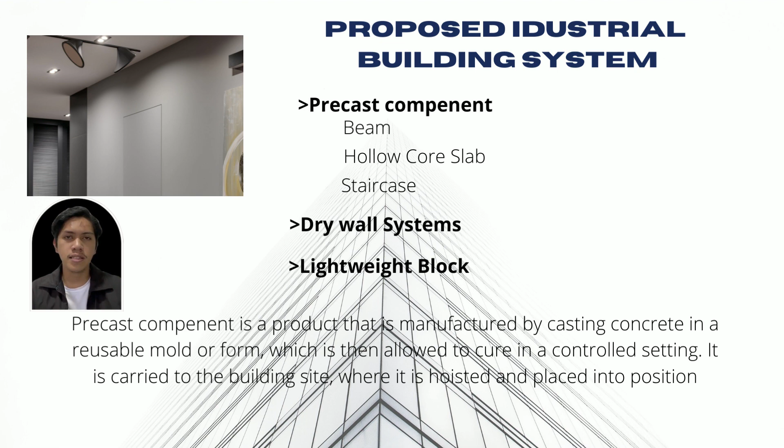Precast component is a product that is manufactured by casting concrete in a reusable mold or form, which is then allowed to cure in a controlled setting. It is carried to the building site where it is hoisted and placed into position.

Precast beam is used for suspended flooring, used as a ledge for other forms of precast flooring to sit on. There are 5 types: T-beam, L-beam, rectangular beam, U-beam, and beam shell. It can be reinforced with either pre-stressed strand or conventional reinforcing bar, depending on the spans, loading, and the precast production method.

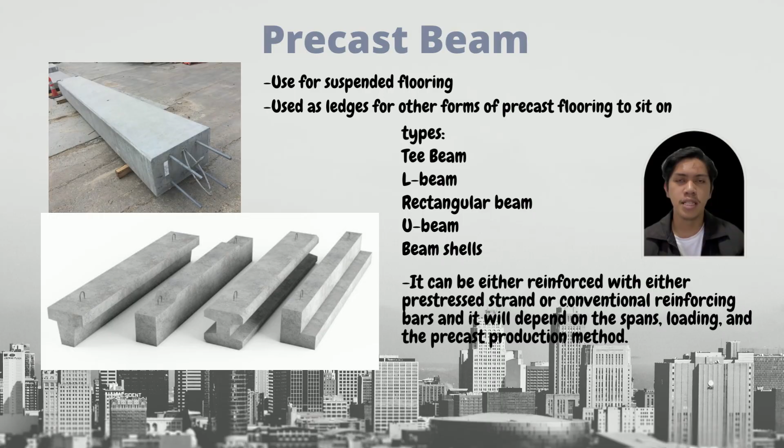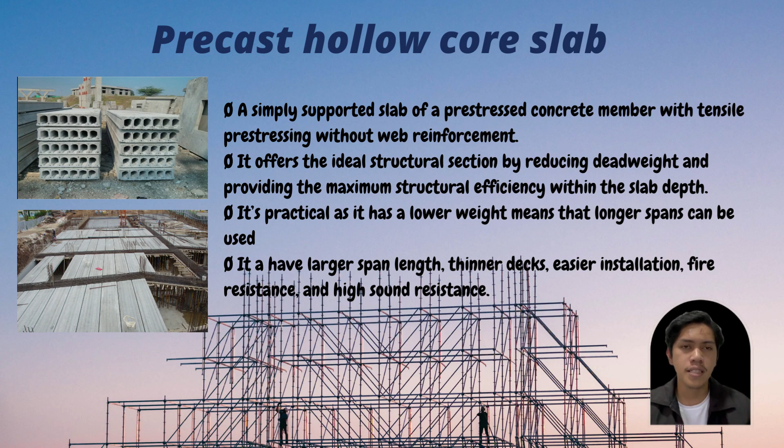Precast Hollowcore Slab is a simply supported slab, a pre-stressed concrete member with tensile pre-stressing without web reinforcement. It offers the ideal structural section by reducing weight and providing maximum structural efficiency within the slab depth. It is practical as it has lower weight, good span length, thinner decks, easier installation, fire resistance, and high sound resistance.

Precast staircase is a structural member that provides access from one floor to another. The precast staircase is made up of reinforced concrete to eliminate the trouble of adjusting the number of steps, riser, and width of the stair flight. It is more precise in measurement, fitting the structural system, with more strength and low maintenance cost. It also saves more cost, saves time and space on site, and reduces wastage of formwork during the construction period.

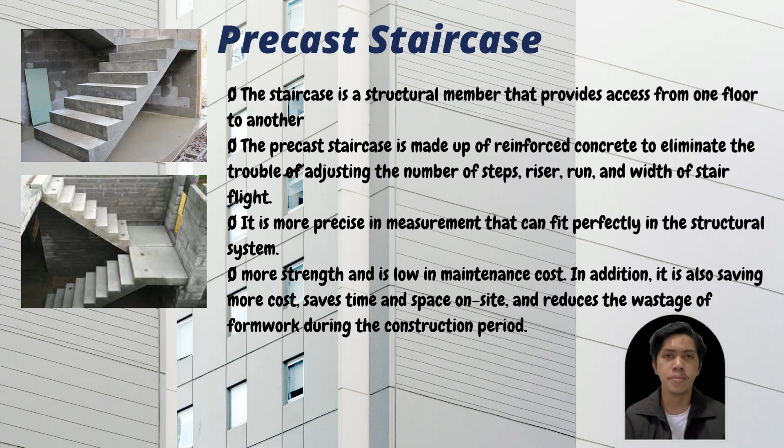Drywall system: it is a series of lightweight walls that are assembled with aluminum zinc alloy coated steel components together with one or more layers of gypsum board fixed to one or both sides of the wall, as well as insulation material.

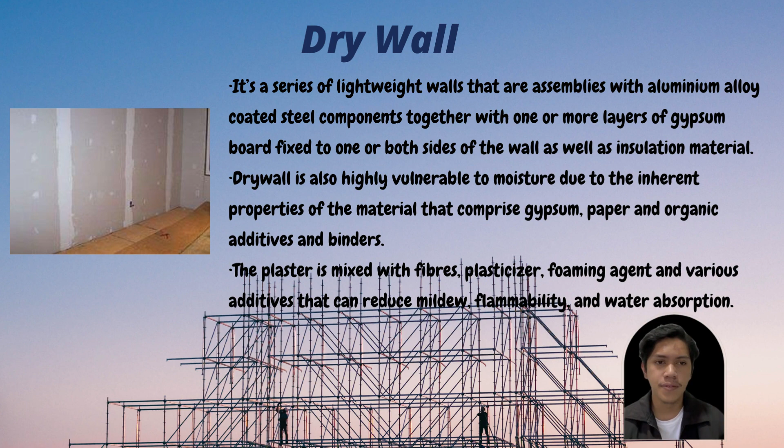Drywall is also highly vulnerable to moisture due to the inherent properties of the material, which comprises gypsum, paper, and organic additives and binders. The plaster is mixed with fiber, plasticizer, foaming agent, and various additives that can reduce mildew, flammability, and water absorption.

Lightweight block is made of expanded aggregates such as shale, clay or slate to reduce the density and weight compared to standard concrete block. It is flexible and easily transportable building material, requiring little support from materials such as steel or additional concrete. It is cost effective, has low thermal conductivity, and is fire resistant.

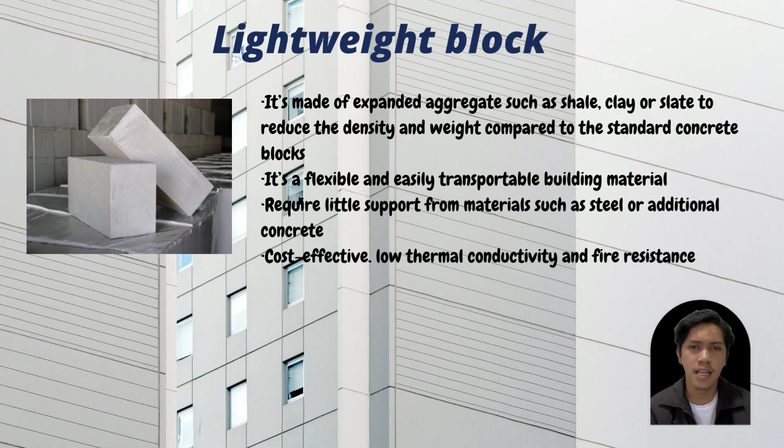The first IBS component used in the case study is precast beam. For suitability, the use of this precast beam is highly demanded by buildings that provide public service such as hospitals, in order to maintain the integrity of the building and prevent adverse events such as earthquakes.

For fabrication, first, the mold used for such application must be extremely durable, which is why steel molds are so popular today. A clean and debris-free mold is required.

Fourth, ensure there is enough curing time and the ideal environment. Then loosen and remove the bolts and pins from the mold case and take out the component from the mold before lifting.

Next is connection detail. The bearing pads on the column corbels are used to secure the precast beam. The pad accepts expansion, contraction and rotation at the bearing region, protecting the supporting concrete components from spalling and cracking. Steel angles are connected to metal plates, formed into the beams and columns, and the connection is grouted solid.

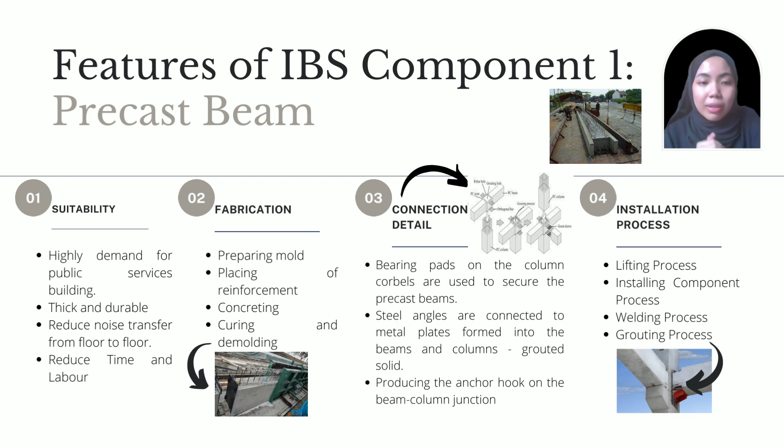For this case study, autoclaved aerated concrete (AAC), a lightweight block wall system, was employed. For suitability, AAC is utilized as infill walls all over the world. It is generally known that infill wall seismic performance in previous earthquakes was inadequate, for both economic and psychological reasons.

For fabrication, first prepare all the materials such as cement with 53 grade ordinary Portland cement, fly ash or sand, limestone powder and gypsum. Second, a container is filled with fly ash.

Pumping is turned off once the desired weight has been pumped in. Conveyors are used to distribute lime powder, cement and gypsum into individual containers. The dosing unit disperses the mixture into the molds in predetermined amounts.

Third, once the raw material mixture is complete, it is put into the mold. Aluminium interacts with calcium hydroxide and water and emits hydrogen gas when the slurry is blended and put into the grease mold. Fourth, once the block has reached chopping strength, it may be demolded and cut into the desired size.

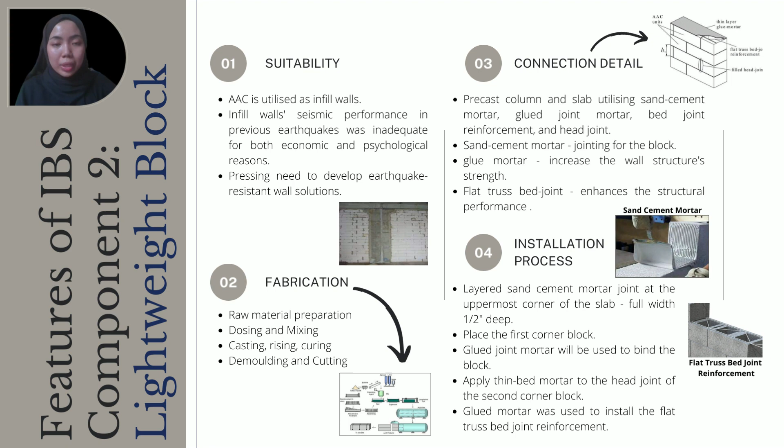Next, for the connection detail, the infill wall system links directly to precast column and slab utilizing sand cement mortar, glue joint mortar, bed joint reinforcement, and head joint for the case study.

To join the blocks together, sand cement mortar will be utilized throughout the wall. To increase the wall structure strength, glue mortar is employed. The flat truss bed joint is masonry reinforcement and enhances the structural performance of the masonry wall by adding resistance to lateral stress like wind.

For the installation process of the lightweight block, first, using a masonry trowel, create a full width, half-inch deep sand cement mortar joint at the uppermost corner of the slab.

Second, place the first corner block in the sand cement mortar and make any necessary adjustment to the junction. Lower or elevate the block to the desired height by tapping it down with a rubber mallet or by putting more mortar beneath it. Third, glue joint mortar will be used to bind the block to the precast column, beam and slab.

Fourth, in a clean mixing container, combine authorized thin bed mortar and water. The thin bed mortar should have a consistency that allows it to flow freely between the teeth of the notched trowel, leaving the teeth formed in the mortar bed. Fifth, using the 15-inch notched trowel, apply thin bed mortar to the head joint of the second corner block.

To finish the leveling course, put a thread between the corners after you have built the lead corners. For the bed joint, sand cement mortar should be used, and for each head joint, thin bed mortar should be utilized to ensure a plumb wall level across each block. And last, glue mortar is used to install the flat truss bed joint reinforcement to guarantee it stays in place.

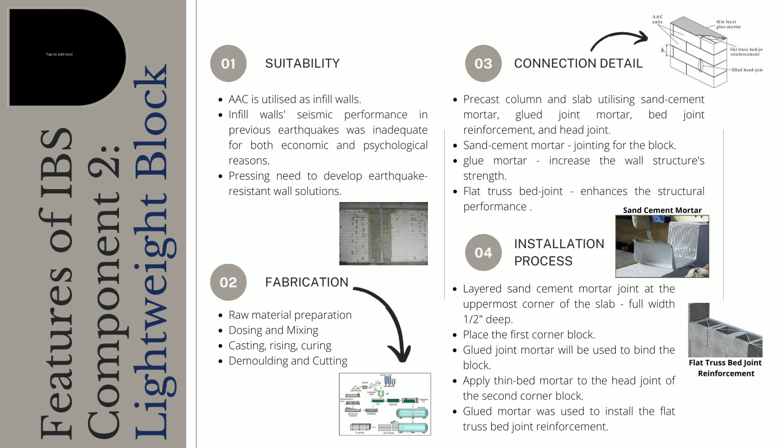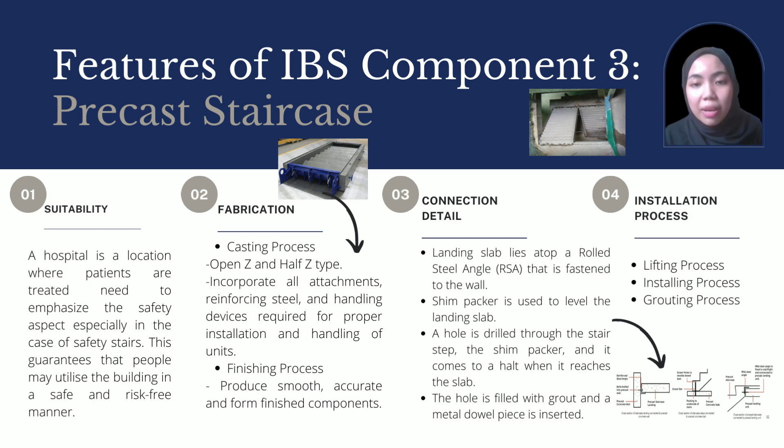Third, grout open areas at connections and joints between platforms and staircase, as well as between platforms and floor planks, once precast components have been set and fastened. Grout should be applied in such a way that it is smooth, plumb and level with the neighboring concrete surface.

Hi, I'm Iza. I will be presenting precast hollow core slabs, which is the fourth IBS component feature. Slabs with a hollow core are pre-stressed concrete components with a constant cross-section. For the suitability of this hollow core slab, this slab is lighter than a massive solid concrete floor slab. This slab lowers the structural weight of the building. With higher quality, these slabs are able to minimize the number of props needed during construction works and have a quicker installation procedure.

For fabrication, first prepare the slab casting bed. Prior to casting, clean and oil the bed. Tensioning all strands for a single bed may be done concurrently or individually over the reinforcing before concreting. After drying, the slab is trimmed to size. After slicing the slab, it is withdrawn from the casting bed, moving the slab to an automatic drilling machine for drainage holes at both ends. Finally, the slabs are graded.

Moving on to the connection details. This slab has two kinds of connection, which are slab to beam and slab to slab.

For slab to beam, a precast beam bearing pad supports the hollow core slab with steel reinforcing bar inserted into slab keyways. It may be left unfinished or topped with concrete. For slab-to-slab connection, site-cast concrete fill and reinforcing steel are employed. The site-cast concrete topping is put to the connecting fill.

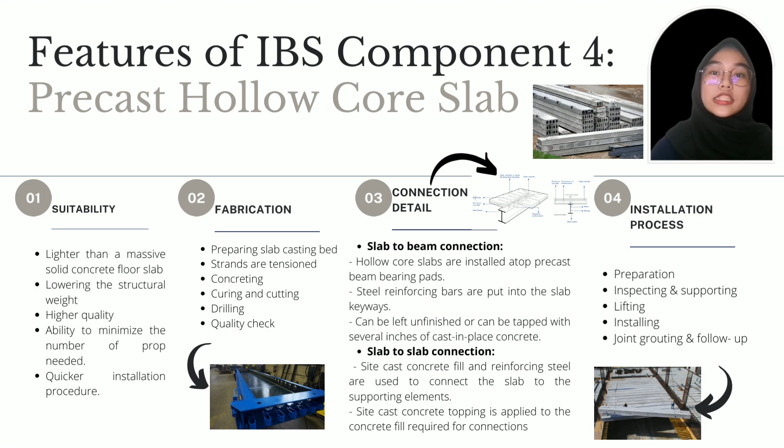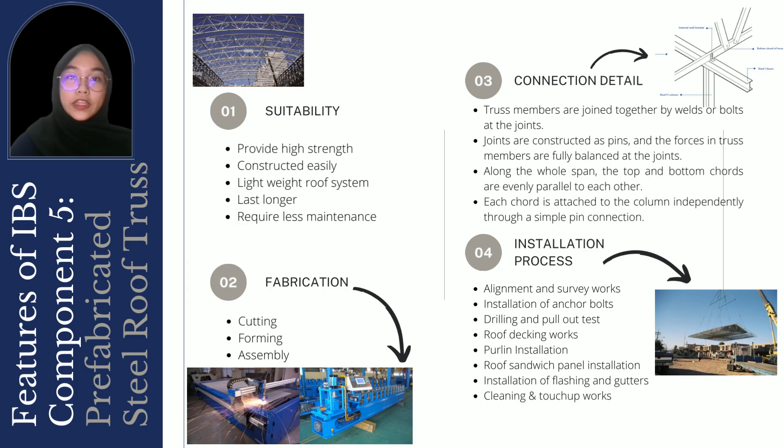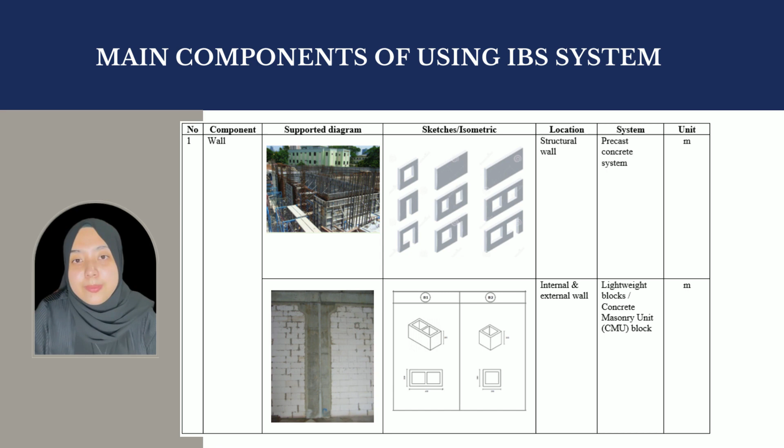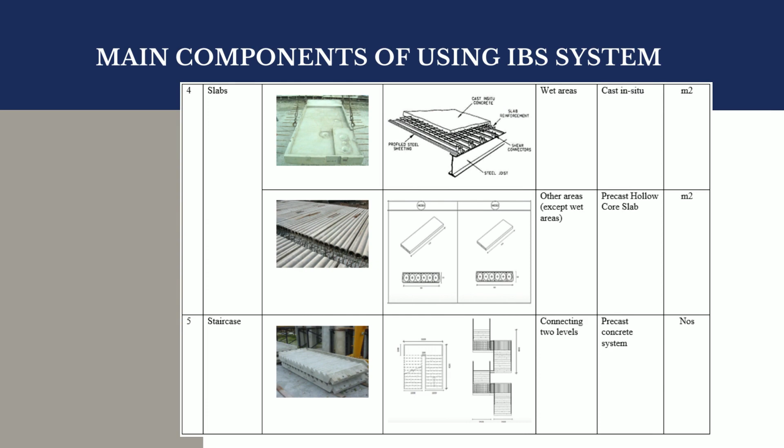The following shows the process of installing the IBS components at the construction site. It will start with the setting out and foundation trenches, the procedure of laying down the excavation lines and center lines on the ground before excavation begins. Then, the strip foundation is laid out referring to the layout.

Next, the ground beam. The beams are used as horizontal connections between the footings and are reinforced with continuous reinforcement developed within or beyond the supported column. Then we'll continue with the slab installation.

The slabs will be lifted by choosing a lifting mechanism that is appropriate for the conditions on the job site, as well as the way the hollow core slabs need to be handled. A spreader beam and lifting clamps will be used to install the hollow core slabs. Column.

The procedure will proceed with installing the formwork, and concrete is placed in the desired spot or into a dumper or pump via a chute that extends from the back of the vehicle. This procedure necessitates a strength test and curing time, making it more time-consuming to produce than precast concrete. The sizes of the precast components are too large to lift, so casting in situ is the best option.

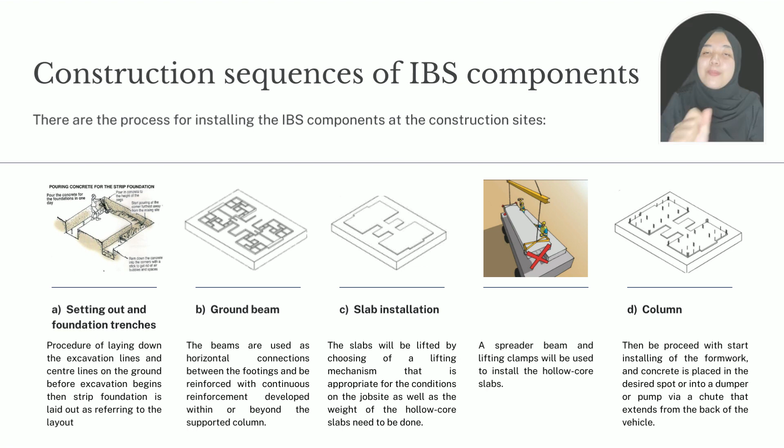Then we'll continue with placing units for the block wall. The first stage in laying out the wall is to take measurements from the foundation or floor plan and then transfer those measures to the foundation, footing, or floor slab. A chalk line or any alternative material is drawn on the foundation surface to establish the line to which the block's face will be put once two points of measurement have been established, corner to corner. A final check of all measurements should be conducted once the entire surface has been marked for the location of walls, apertures, and control joints.

Starting with the corners, the lightweight block lays the first course without mortar so that the dimensions on the floor or foundation plan can be checked against how the first course meets the plan. The concrete block will be installed throughout the entire width and length of the foundation, floor slab, and even across openings during this dry layout.

Lintels for door and window openings. When building with a concrete block wall, a lintel must be installed before the load-bearing wall may be opened. A lintel transfers the load of a wall away from the material beneath it and into the foundation of a building, allowing new openings in the wall to be built without causing serious damage to the entire structural system.

First floor slab. For this case study, it used the hollow core slab, which is then mounted on the beam, and the reinforcement bars are blended into the hollow core slab to ensure that the slabs are securely fixed. The same process is repeated subsequently for each floor.

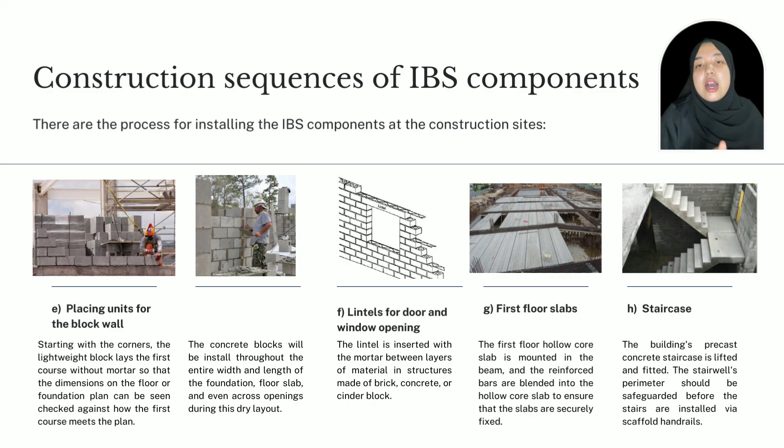Moving forward to the IBS score calculation for the building. So what actually is an IBS score? IBS score is an organized evaluation system used to quantify the use of IBS in a consistent manner. Higher IBS scores imply higher productivity, less site labor, less wastage, fewer site materials, a cleaner environment, better quality, neater and safer building sites, and cheaper total construction costs. So how do we calculate the IBS score for a specific building? We can calculate it using the IBS score formula.

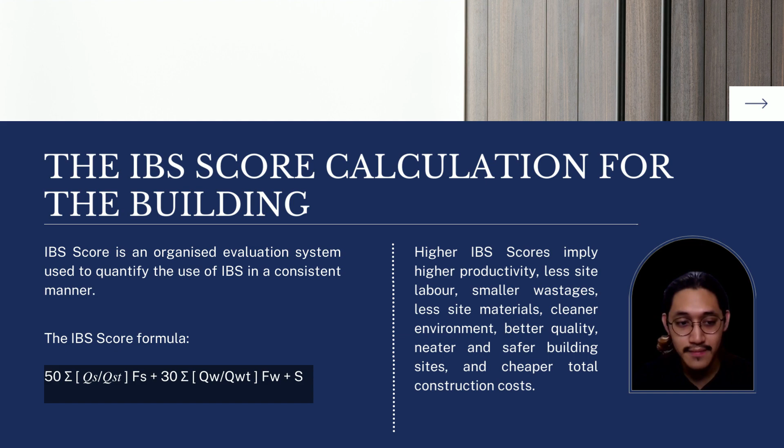There are three components to calculate the maximum IBS score for a building. For our selected case study, Hospital Kuala Lumpur HKL Block A1, the first component is the structural system, with a maximum score of 50 points. Using the formula below, QS over QST is the percentage of the construction area in which a particular structural system is used. Meanwhile, Fs is the IBS factor for the particular structural system. Structural systems include, for example, precast concrete beams and columns, steel, and prefabricated timber.

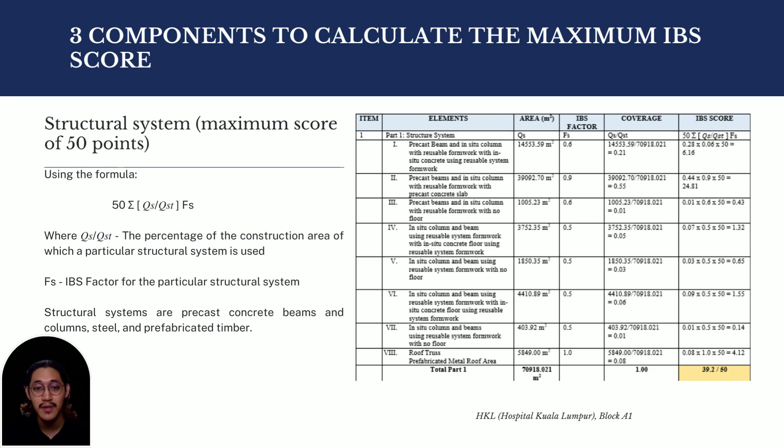The second component is the wall system, with a maximum score of 30 points. The formula is quite different from the structural system, where QW over QWT is the ratio of the length of a particular wall system, external or internal, used out of the total wall length of the building. Meanwhile, FW is the IBS factor for the particular wall system.

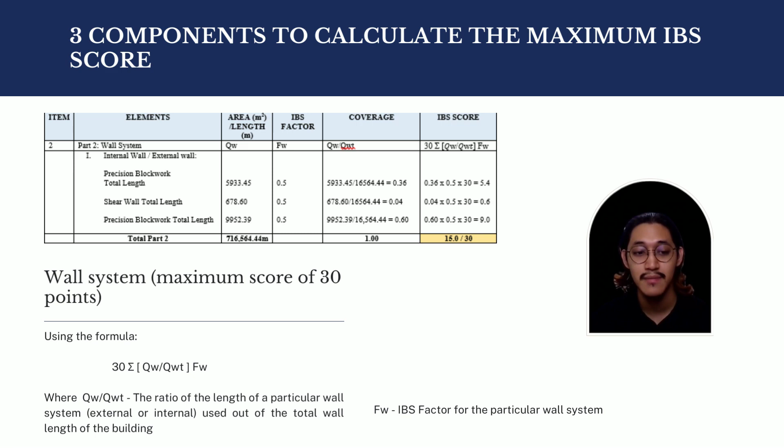The last component is other simplified construction solutions, with a maximum score of 20 points. Points are given based on the percentage of coverage of a particular solution and summed up to form the IBS score for this section. No points are given if the coverage is less than 50%. So if we total up the structural system, the wall system, and other simplified construction solutions, we obtain 70.2 over 100, which has reached the target IBS score for this particular building.